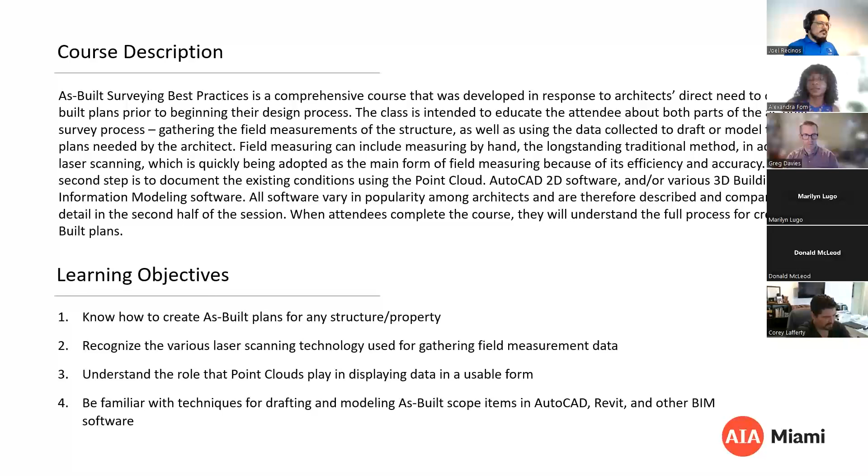We have three main topics we'll run through today. The first being what are as-built plans. Then we'll touch a little bit on the two processes of collecting and gathering your on-site data. Finally, we'll run through how you could create your as-built sets in AutoCAD or Revit.

Now, what are as-built plans? In simpler terms, as-built plans are just drawings or models that accurately represent the existing dimensions and conditions of a building. Before we go any deeper, I'd like to mention that today we'll only focus on production of as-built plans in a 3D Revit model or 2D CAD files. However, it's important to know there are other software options out there you could use to develop your as-built plans.

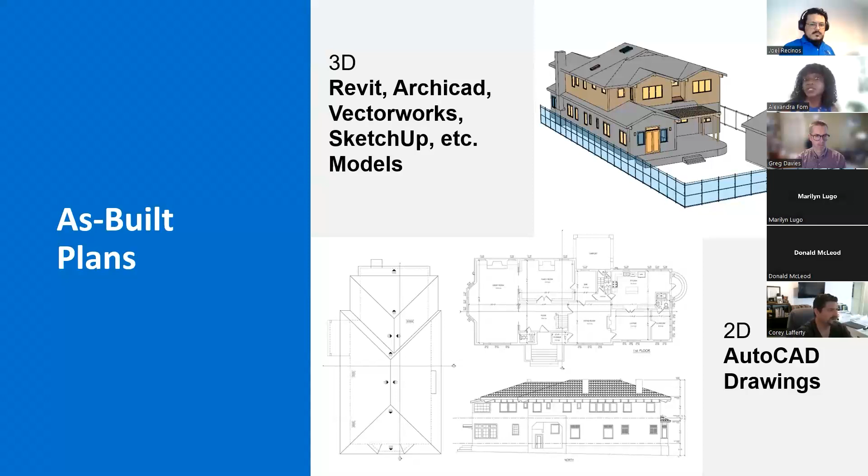Before we start with our first content for today, I'd like to pause here for a quick poll. Feel free to type your comments and answers in the chat below. The question is, how do you currently create your own as-built sets? A, I create them myself. B, I have an internal team. C, I partner with an as-built professional. I'll give you a second to do that.

So, collecting your on-site data. Before we go into this, I'd like to mention we have two main processes for doing this. The first being the traditional process, which I'm sure you're all familiar with — this involves taking pictures and sketching. Then we have the more advanced method, which involves using laser scanners. When you're scanning the project, processing that data is a very crucial part of the on-site activities.

Traditional methods — the traditional method, like I said, is basically just sketching, and I'm sure you're all familiar with sketching, so I'll keep this simple and brief. Just remember that sketching does not need to be to scale. You just want to make sure you have enough room on that paper to take down your dimensions and some important notes. Get all your sketching done before you start taking dimensions. This process is important so you can take your dimensions quicker, and it's also important when you're taking your running dimensions.

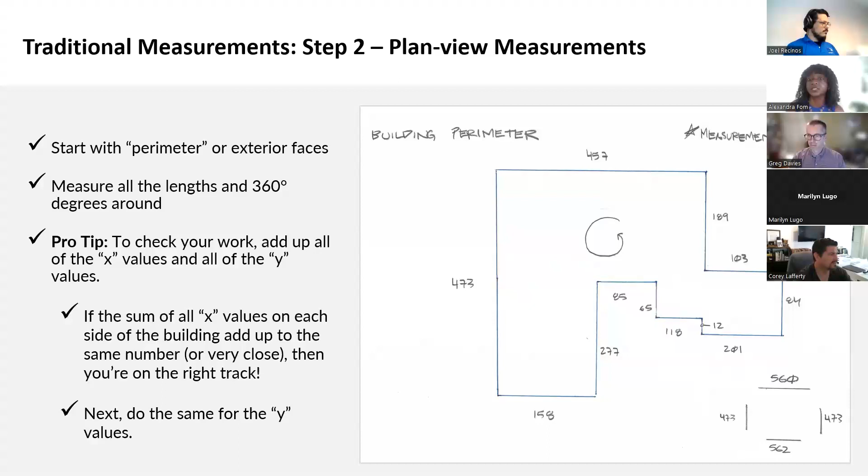Next, you want to save time, and you can do that by using tracing paper to take down your dimensions. As you can see on the image on screen, you can add more information or symbols using different color pens. For this process, I'd highly recommend a sketch pad that comes with vellum, so you don't have to carry multiple items on site, especially if the site you're working on is complicated or just not pretty.

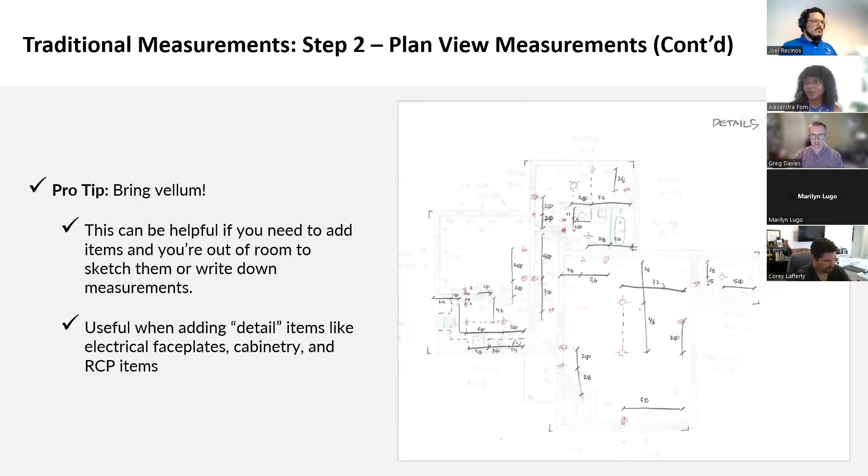With that, this concludes our traditional methods of surveying. I'm going to pass it over to Greg now, who will run us through the advanced method using a scanner to collect data.

Awesome. All right, Greg. Thanks, Alex. Yeah, that all brings me back to the good old days of as-builts.

Quick introduction: I've been performing as-built surveys for 22 years, and I've been with PPM for 7 years, where I led the effort to bring laser scanning into our as-built workflow. One thing I learned the hard way is that updating and replacing a proven traditional method with new technology is not easy, no matter what industry you're in. But the first step you take is the most important, and the rest is hard work and diligence.

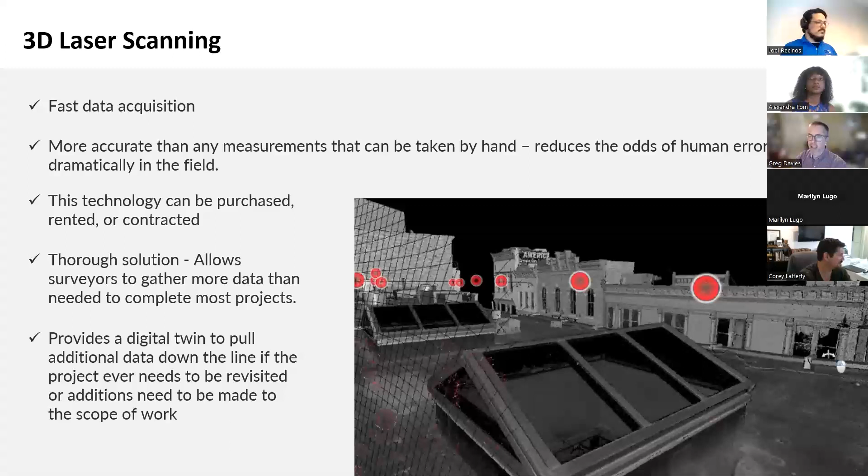Even though it may be difficult to transition, making the change to laser scanning as a survey method for as-builts provides fast data acquisition and more accurate measurements than anything taken by hand. It reduces the odds of human error dramatically in the field. It's a thorough solution, allowing us to gather more data than we need to complete most projects, and it gives us a digital twin to pull additional data down the line if projects need to be revisited, or if additions need to be made to our as-built scope of work.

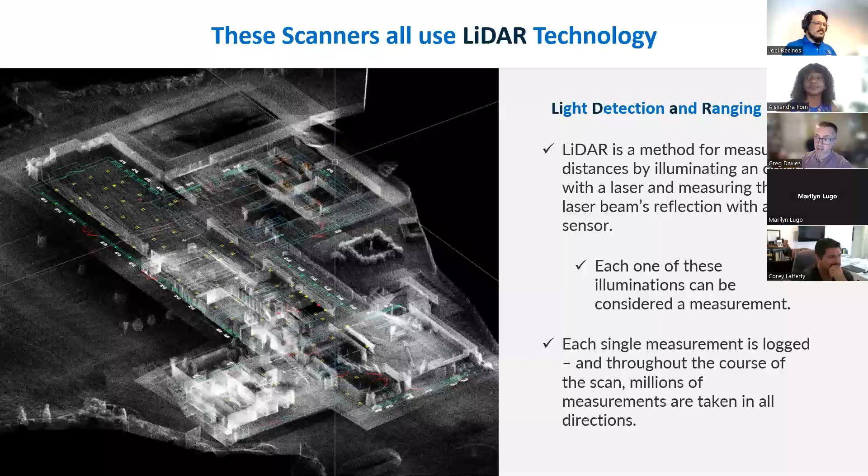So what does LiDAR mean? We hear about it in news articles about autonomous vehicles and robots, and it's the same technology we use to get survey data. It stems from the word radar, which stands for radio detection and ranging. That's a much older technology, but it works similarly. LiDAR is a method for measuring distances by illuminating an object with a laser and measuring that laser beam's reflection with a sensor. Each measurement is logged, and throughout the scan, millions and sometimes billions of measurements are taken in all directions.

Let's talk about some LiDAR scanners currently used for architecture, engineering, and construction. When we need very accurate measurements or intricate detail for historical projects, structural or engineering analysis, or prefabrication projects, we go to our favorite scanner, the Leica RTC 360.

Even though this needs to be set up on a tripod, the individual scan times for the RTC 360 are relatively short compared to other terrestrial scanners, making it the fastest terrestrial option out there. The iPad also helps make sure you can check your point clouds, the resulting data from the laser scanner, before leaving the job site.

This scanner is extremely precise and gathers so much data that point cloud files can be over 500 gigabytes. Whether we use the onboard camera to make a color point cloud or not, we always get very dense and accurate data that allows us to draft and model ornamental detail, pipe valves, and other intricate details with precision.

Because our final data is made up of hundreds or even thousands of scans performed with this scanner, it's ideal for starting and stopping, which is sometimes required in busy spaces like hotels, shopping malls, and industrial spaces. In the next slide, we'll see a short video of a point cloud generated using this scanner.

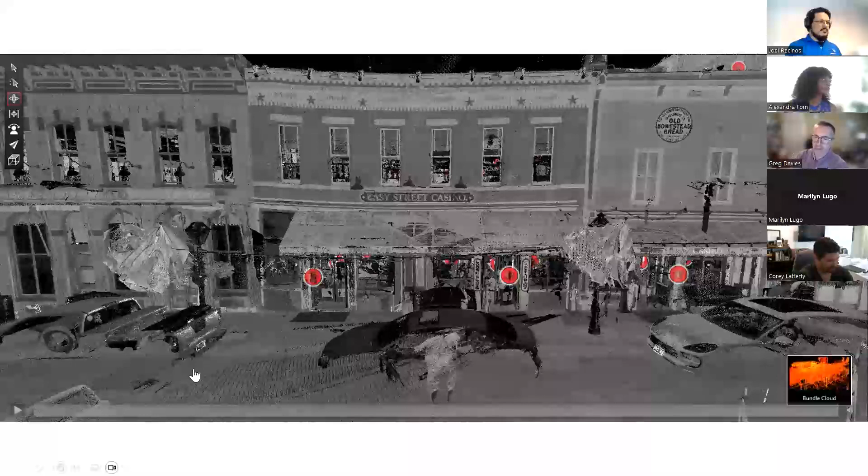While our other scanners can be moved while operating, the RTC 360 needs to be placed in multiple positions all over the building to get a full set of measurements for our plans. Each red dot here is a place where we strategically positioned the scanner to gather black and white data. Even though we did not use the camera for this data, you can see how much detail we get using the black and white measurements gathered.

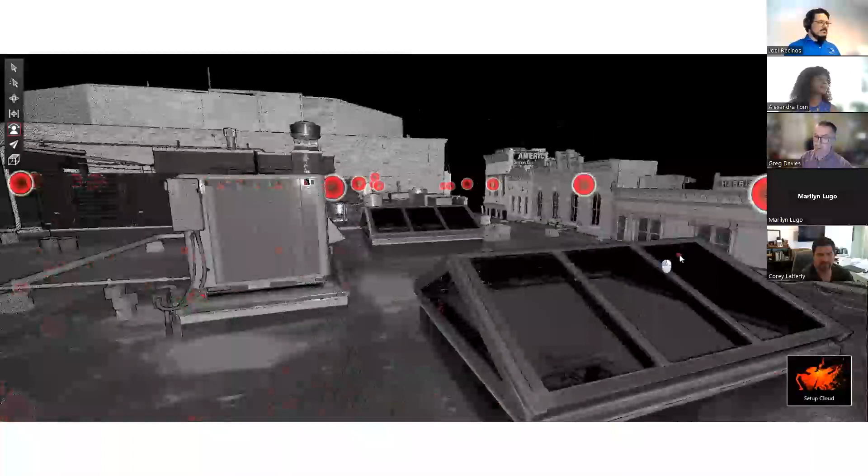Each black and white point or pixel is a representation of an actual laser measurement, accurate down to less than 2 millimeters. This means the entire 3D picture you're looking at is dimensionally accurate. We used this data to help an architect identify floor sagging, wall sagging, and other structural issues before a major remodel of this 100-year-old casino in Colorado.

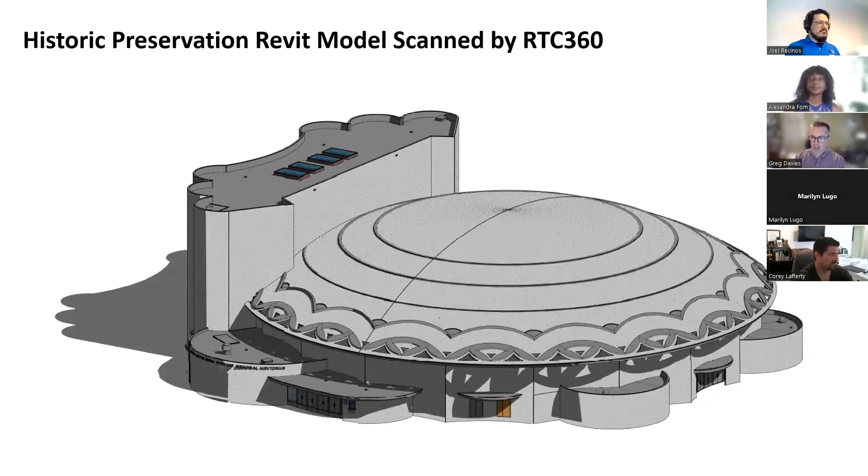In the next slide, we see the interior of this auditorium. It took our modeling team a combined total of 304 hours to model every single architectural, structural, and almost every mechanical feature in the building, including all mechanical piping 2 inches in diameter and greater throughout the entire building.

The client needed this accurate model and scanning to be able to update all of the structural footings and slab that are currently at risk due to erosion and water damage. As part of this, they also expect to make a large upgrade to their mechanical systems, both for the building itself and theatrical devices in the space.

So just another example of what that Leica RTC 360 can bring in terms of precision to large, complicated projects like this.

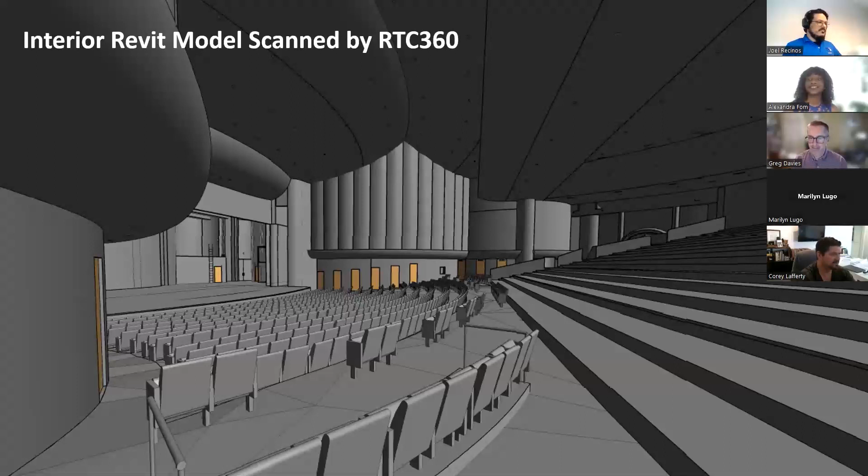And with that, I'll hand it back over to you, Alex, to tell all of you more about our super fast mobile scanners. Awesome. All right, mobile scanners. They're handheld and very easy to use. We have 2 types of mobile scanners, which we'll discuss shortly.

You want to use a mobile scanner, preferably if you need accuracy and your time on site is limited. Since most of the individual scans only take about 15 to 45 minutes, we recommend that you scan and process your scans on site before you leave, so you could look at the results.

Once the scan is complete, you need to use the SLAM algorithm software, which interprets all the measurements and movement data from the scanner to produce the 3D point cloud. After the 3D point cloud has been created, you need to review that point cloud data to ensure accuracy. Most errors that do occur when scanning can be spotted quickly, and actions such as rescanning can be taken to ensure your overall project accuracy.

This is what your point cloud data looks like in plan view. You can see that even though there's no photo-based colorization of the points, these points are colored on a height ramp, where points at different heights are shown as different colors on the spectrum, as you can see on the left side of that image.

The red is the lower heights, and then you go into the blue and the cyan representing the higher heights. Coloring the points this way makes it easier to see important features in the point cloud, even without a photo colorization.

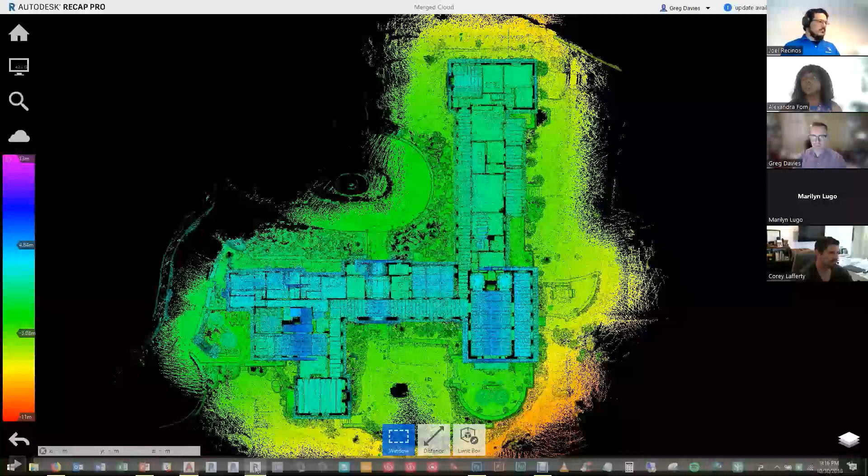All right, we said there are 2 scanners. This is the mobile scanner. It's one of my favorites. This scanner does reduce your time spent on site by 90%. It collects over

300,000 points per second with a 6mm accuracy. It also covers a range of 100 meters, and you can scan up to 50,000 square feet of space in just hours. With this scanner, you can scan pretty much anything. It has to be visible, of course.

We've used it to scan single-family residentials. We've done commercial spaces, retail spaces, warehouses, and more recently, we did a scan for the rehabilitation process for the Apollo mural restoration in South Beach. So for those of you from South Beach, you're probably familiar with that particular mural. So yeah, like I said, pretty much anything, it just has to be within the scope of that scanner range. This is a very expensive tool, so you want to be very cautious when using it on site.

Here is an example of a project we scanned using the Horizon mobile scanner. This is a 9,000 square foot single family residential house located in Washington, DC. This beautiful property was built in 1836, and as you can imagine, there were no as-built plans to reference. So the client requested our remodel package, which includes a floor plan, roof plan, exterior elevations, and still photos.

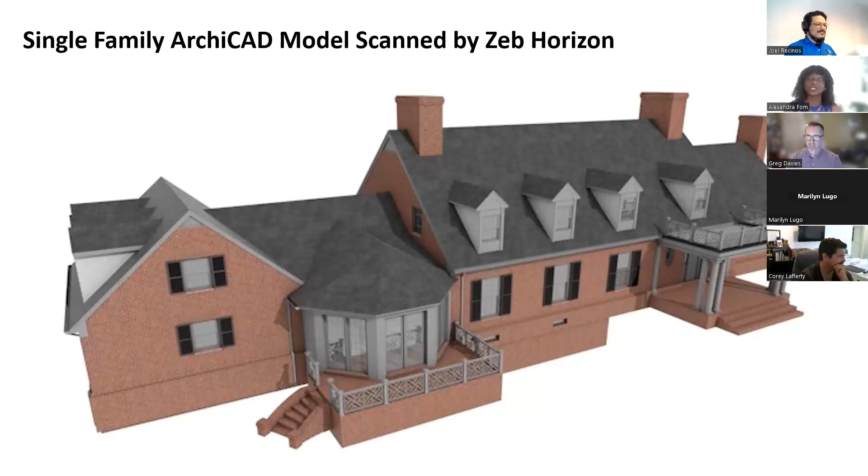This project was modeled in ArchiCAD, and it took our team about 36 hours to completely draft it from the point cloud data. The total time spent on site to survey this property was 6 hours. So just imagine how long and difficult it would have been if you were using just the traditional method we discussed earlier.

Here is the second mobile scanner. Just like the Horizon, the Revo scanner is also handheld. It's just slightly smaller in size than the Horizon. It also reduces the scanning time by 90%. This scanner collects 43,000 points per second with a 6mm accuracy. Again, you can scan just about anything using this scanner.

The only thing to note is that the Revo scanner collects fewer points than the Horizon. So for larger projects, you may need to merge more cloud data. Again, you can scan up to 50,000 square feet of space in hours. Of course, you have to consider the construction type and the density of that project.

Here is an example of a mixed-use project we scanned using the Revo. This is a 27,000 square foot building located in Seattle. The client requested floor plans, roof plans, exterior elevations, reflected ceiling plans, and interior elevations. This image is just showing what the RCP ended up looking like. And as you can tell, it was a very dense project. It took our team about 8 hours to scan and 36.5 hours to draft the project in AutoCAD.

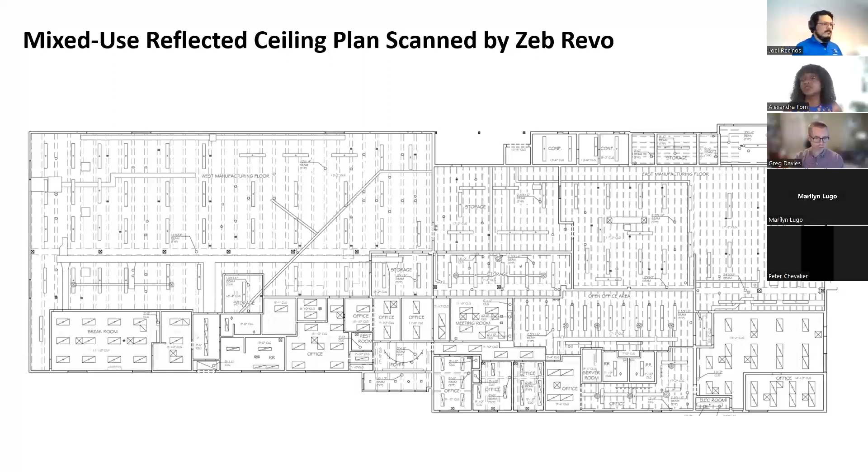Now that we have explored the tools used for the advanced method of data collection, let's take a quick look at the point cloud data. After processing your scans, you want to check that on site, but you also want to check that before you start drafting. You need to review the point cloud data to ensure that all areas were covered during the scan and that you have no flaws such as drifting or any other errors that may occur.

One last thing, since the scanner has such a wide range, you want to make sure you trim or crop your point clouds to eliminate any excess data from your long-range scanners. For the larger projects, you would need a point cloud software to merge and streamline the point cloud data. And just like the traditional method, with much practice, it becomes easier to recognize a bad scan, and you also get better at preparing ahead of time to minimize errors during a scan.

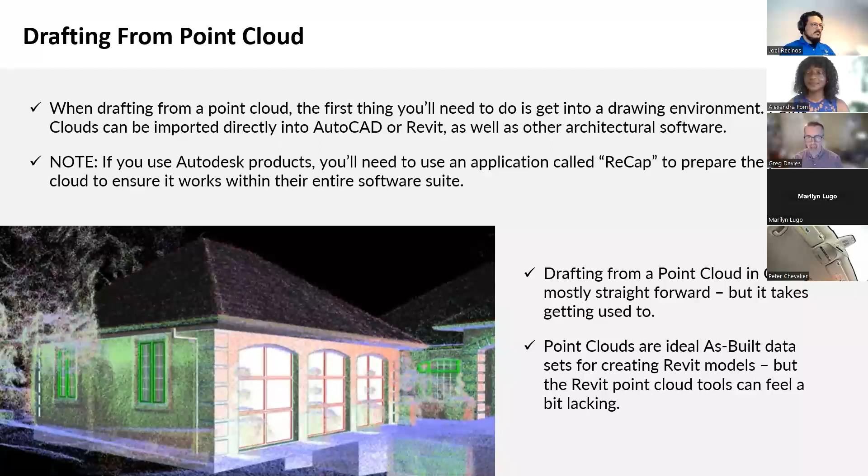Once you have the point cloud well positioned to begin drafting, you should be able to derive all of the walls, doors, door swings, and any other visible architectural and structural information right from the point clouds. Some scanners will not pick up smaller items, especially if they are flush with the walls or the ceilings. Trying to locate them in the cloud can be very time consuming. So often we find it better to use the more traditional measurement tools while in the field to sketch and measure things like electrical items on the walls.

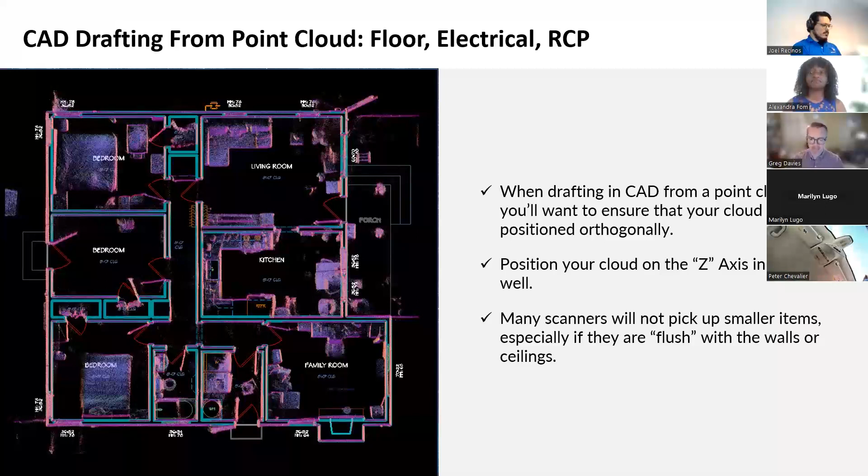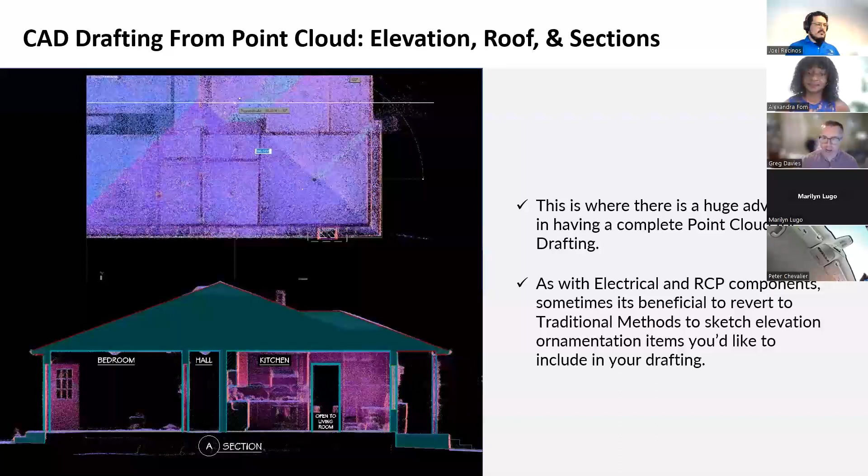Okay, so we talked a little bit about AutoCAD and drafting in AutoCAD, but let's see how this works in Revit. So first things first, I want to talk about something that's very important to us here at PPM regarding Revit, and that's the level of development. This system was created for the AEC community to put standards on BIM models. It describes the different ways in which 3D objects can represent existing or design elements in a BIM model, with level 100 being the lowest, meaning that you just mass your objects roughly, and level 500, the highest, being so detailed and exact, you are essentially building a virtual version of the structure. Every nut, every bolt, every washer, everything.

When modeling as-built plans, LOD 200 is the most applicable level of development. During the as-built scanning, we are assessing a structure that has been built from the outside. And with many of the interstitial spaces being inaccessible, the specific construction of many architectural and structural elements cannot be determined, which is what is required for higher levels like LOD 300 and above.

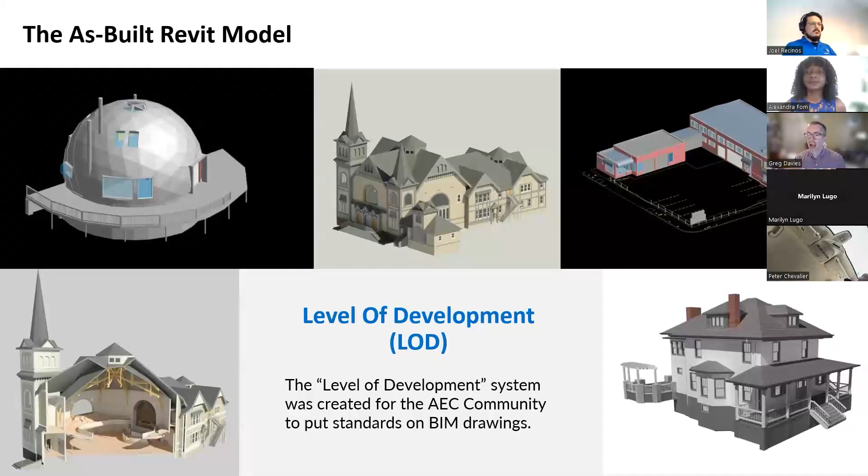So just wanted to get that out of the way real quick.

Let's talk a little bit about modeling from a point cloud. So similar to drafting in AutoCAD, the first thing you need to do to work with a point cloud in Revit is to make sure that you have it in the ReCap format so you can use it with Autodesk products like Revit. Then using the point cloud to guide modeling in 3D, it can be a little more complex than drafting in 2D.

However, the benefits of having all elements of a building related to each other in a set of 3D drawings can be valuable to your design and planning process, because you can see the way things interact with each other in a way you can't see in a set of 2D drawings. So viewing this point cloud and model in 3D provides even more information about how structure, MEP systems, and architecture all interact, far more than you would find with just a 3D model alone.

Modeling an as-built in Revit may seem overwhelming at first, but a solid order of operations for creating usable Revit models will go a long way. So let's talk about a few things you need to do before starting your modeling to make sure you can put the best foot forward.

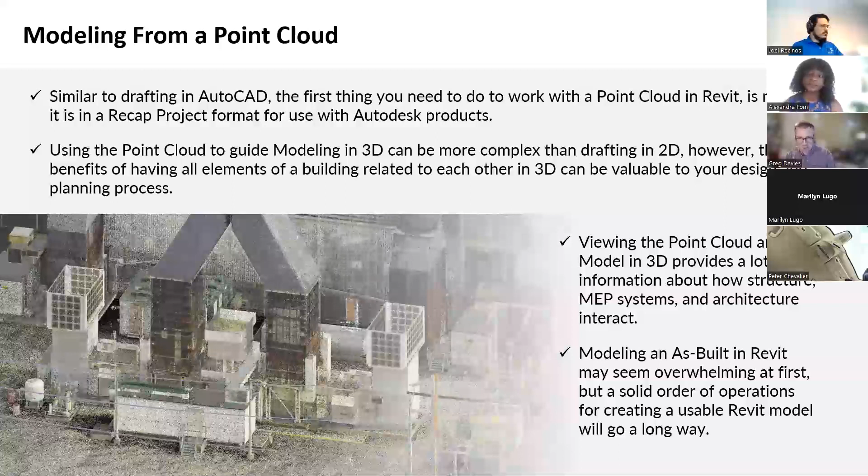So first, let's talk about modeling the plan view items from a cloud in Revit. When modeling in Revit from a point cloud, you'll want to ensure that your cloud is positioned orthogonally, just like in AutoCAD, so that you can use the ortho functions to easily place walls. Then, much like we do in AutoCAD, we set the finished floor of the first level to 0, 0, and then we create and set all other levels in Revit to key features in the point cloud, whether that's other levels or plenum or top of roof, etc.

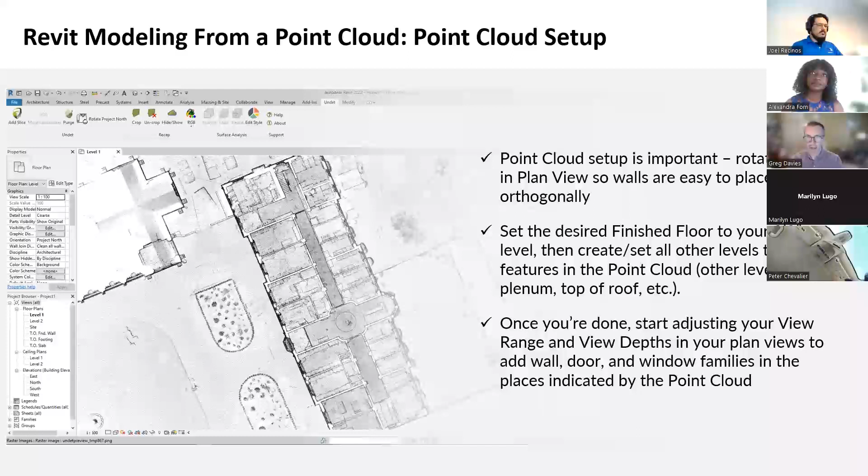Once you're done setting the finished floor, you can start adjusting your view range in plan view and view depths to start adding your walls and your doors and your window families in the places indicated by the point cloud. So as with AutoCAD, this is where there's a huge advantage in having a complete point cloud for modeling. Drawing sections and adjusting section depth is crucial to viewing point clouds effectively when adding and adjusting window heights, door heights, creating roofs, and other elements in your model.

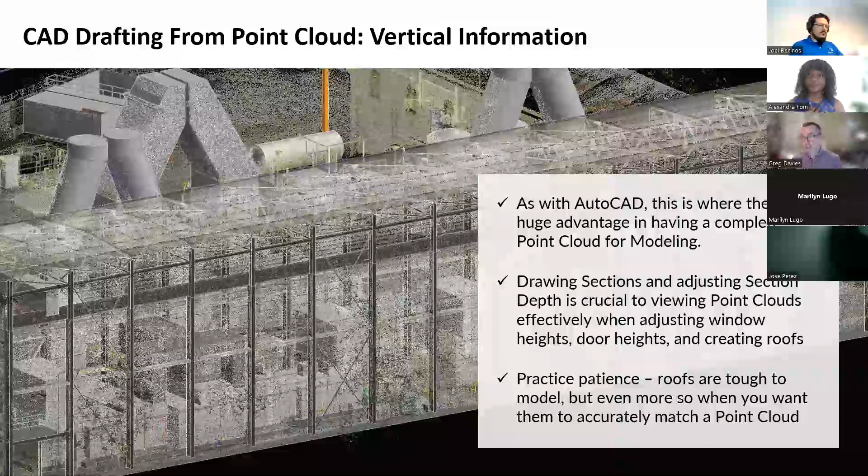It's very, very important as you're running through this process and using a point cloud to model a Revit model to practice patience. Roofs in particular, particularly residential roofs, are very tough to model. But even more so when you want to make sure you're matching them as accurately as possible to a point cloud to get those slopes and curves and things just right. So that's it from me on some of the technical aspects of drafting and 3D modeling from the point cloud.

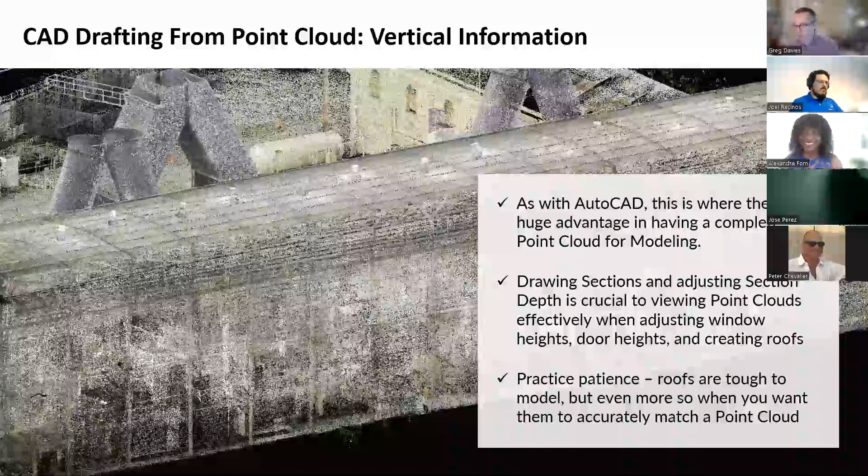Alex, back to you. All right, there are some advantages to having a BIM as-built, some of which you may already know. Sometimes a 3D model is only considered for presentation for design purposes, but it can also be useful as an as-built as well.

All right. Now we're about to take our last poll. What is the most important factor for you when you're generating your as-built plans? A being the quality and assurance, B being timeliness and turnaround time, C, efficiency, and D, cost.